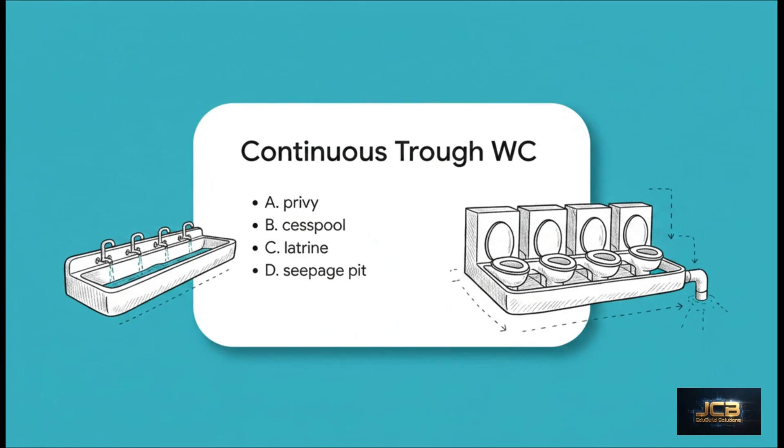Got your answer? The correct answer is C, latrine. The big giveaway here is the phrase continuous trough. When you see that, you should immediately think of a communal, multi-user setup like in a military barracks or a temporary work camp. That's a classic latrine. Let's keep the ball rolling.

The unobstructed vertical distance through the free atmosphere between the lowest opening of the pipe and the flood level rim of the receptor. What do we call that? Your options are A, air break, B, air gap drainage, C, indirect waste, or D, air gap water distribution.

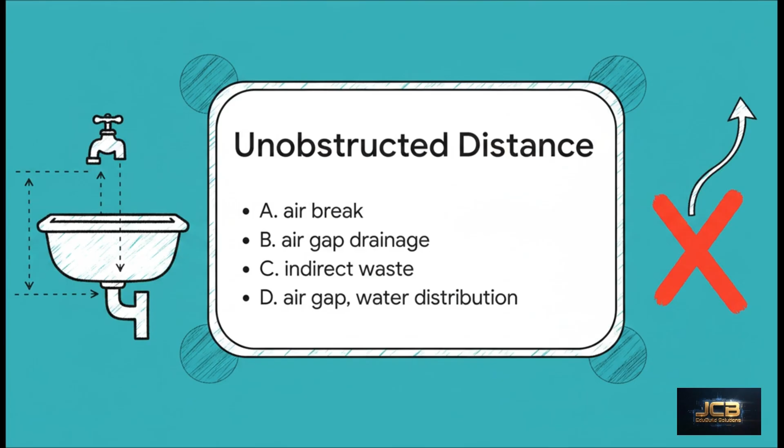The correct answer is D, air gap water distribution. Guys, this is a non-negotiable safety feature. That physical separation is what makes it impossible for contaminated water to get siphoned back into the clean water supply. It's absolutely fundamental. All right, an important definition here.

Discharge from any fixture which doesn't contain fecal matter. Is that A, wastewater, B, solid waste, C, liquid waste, or D, waterborne waste? And the answer is C, liquid waste. You need to know this specific term. It's what we call wastewater from places like sinks, showers, and washing machines. This is what distinguishes it from black water or soil waste, which, as you know, does contain fecal matter.

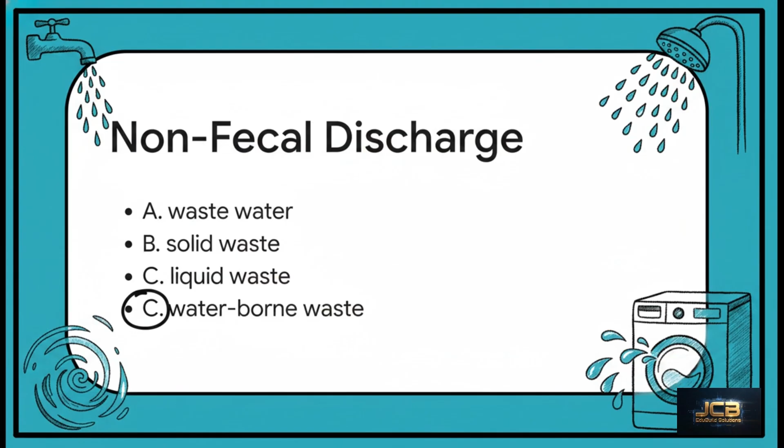Let's talk about fittings. What do you call a pipe flange that is not drilled for bolt holes? Is it A, blind flange, B, bolt flange, C, closet flange, or D, blank flange? The correct answer is A, blind flange.

Now don't get tripped up by the term blank flange. I know it sounds right, but the official industry term you need to remember is blind. Its whole purpose is to completely seal off the end of a piping system. No holes means no passage. Simple as that. Time for a quick but crucial acronym check. You will see this on plans and specs all the time.

What does IPS stand for? A, internal pipe size. B, International Plumbing Society. C, International Piping System. Or D, iron pipe size. The correct answer is D, iron pipe size. This is a key North American standard for pipe dimensions. And, quick tip, always remember it refers to a nominal size, not the exact measurement of the pipe's inside diameter.

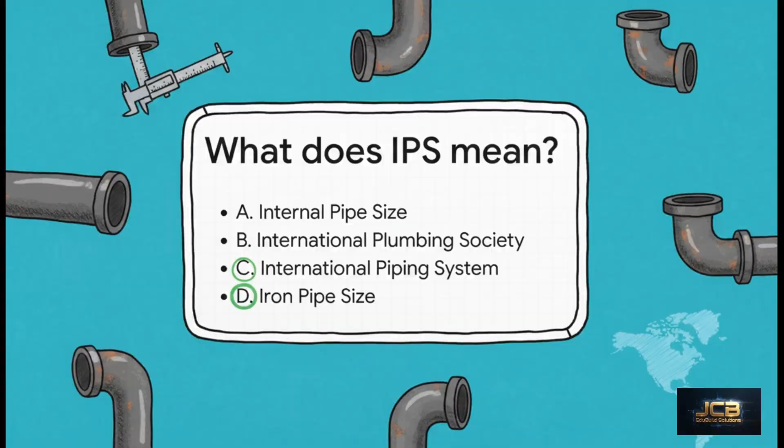All right, think about different on-site disposal systems for this one. A non-watertight receptacle where raw sewage is discharged and seeps through the sides and floor. Is it A, seepage pit, B, septic tank, C, cesspool, or D, catch basin? The answer is C, cesspool.

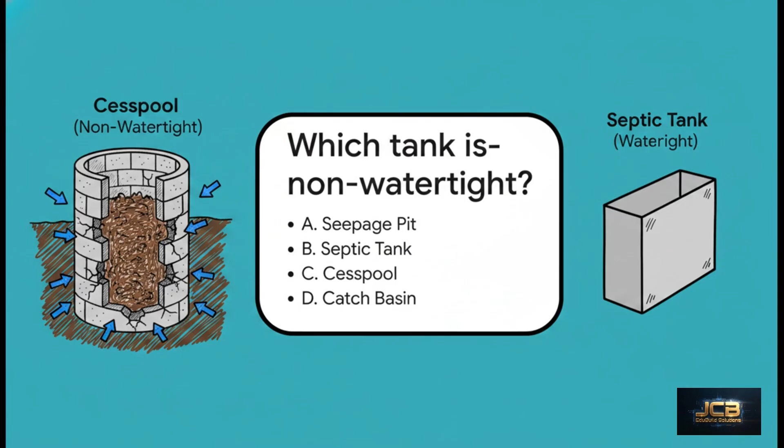The absolute key phrase here is non-watertight. A septic tank is a sealed container designed to treat waste. A cesspool, on the other hand, is basically a pit designed to let the liquid waste, or effluent, seep directly into the surrounding soil. Big difference.

How about this one? What do you call a drain that receives both sanitary waste and stormwater? Is it A, sanitary drain, B, storm drain, C, combination drain, or D, all of the above? The answer is C, combination drain. You'll find these in many older municipal systems where one big pipe handles everything. As you know, modern plumbing design almost always calls for separating these two systems.

Last one for this round. What do we call an extended portion of pipe closed at one end with no connections that allows liquid or air to stagnate? Is that A, clean out, B, branch, C, dead end, or D, air chamber? The answer is C, dead end.

And this is so important to remember. Dead ends are almost always prohibited by modern plumbing codes for the very reasons stated in the question. They cause stagnation, which leads to sediment buildup, clogs, and really bad odors. Fantastic job on round one. You're nailing the vocabulary. Now, let's switch gears.

In round two, we're moving from definitions to applications. This is all about knowing the specific codes, rules, and standards you'll have to apply on the job and on your exam. All right, first question in round 2. This is a straight-up code question. Fill of grease interceptor. Is it A, 2, B, 3, C, 5, or D, 6?

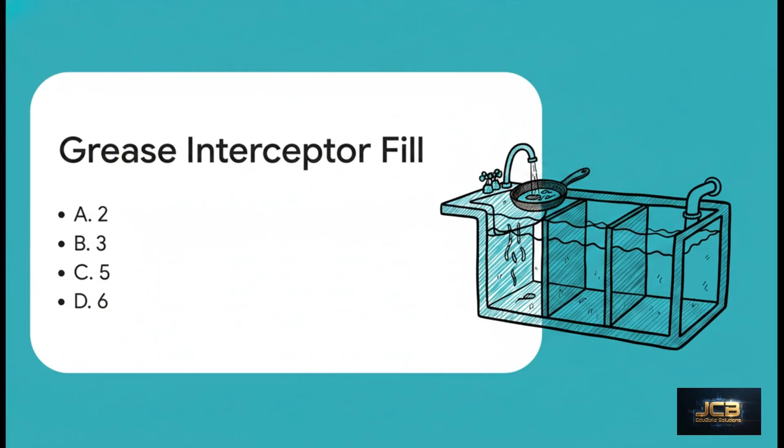The correct answer is C, 5. Look, this is one of those numbers you just have to commit to memory from the codebook. There's no way around it. It's a standard value, and you're expected to know it cold. Okay, a long one, but it's important.

Which section of the code makes it unlawful to deposit things like ashes, cinders, or flammable liquids into the drainage system? Is it A, Section 1202.1, B, Section 1202.2, C, Section 1202.3, or D, Section 1202.4? The correct answer is B, Section 1202.2. Knowing the key section numbers for major rules and prohibitions like this one really shows the examiners that you've done your homework.

Let's tackle a classic fixture unit problem. What is the fixture unit for an air conditioning unit that has a flow of 0.05 liters per second? Is it A, 1, B, 2, C, 3, or D, 4? The answer is A, 1. This is a standard value you pull directly from the fixture unit tables in the plumbing code. Getting these calculations right is the bedrock of sizing your drainage systems correctly.

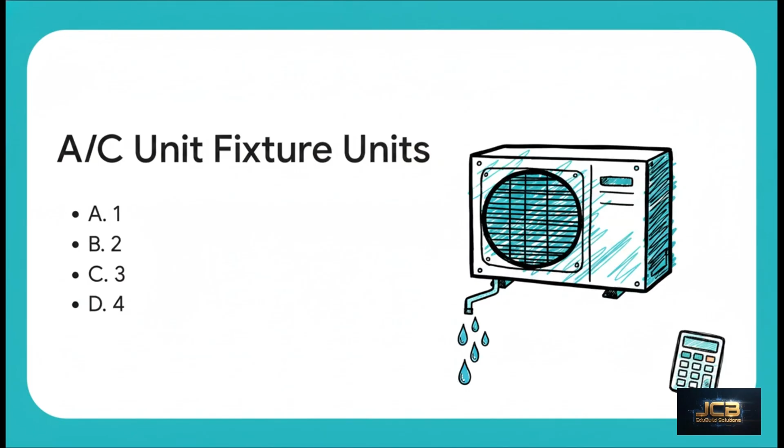Here's a question about material-specific rules. No cast iron pipes shall be blank. A, caulked, B, soldered, C, threaded, or D, welded. The correct answer is C, threaded. And the reason for this is pretty simple. Cast iron is brittle. If you try to cut threads into it, you weaken the pipe and make it incredibly prone to cracking under pressure. That's why we use other joining methods, like bell and spigot joints or mechanical couplings.

Okay, a very practical question about system layout. What's the maximum horizontal distance of cleanouts? A, 30 feet, B, 40 feet, C, 50 feet, or D, 60 feet? The code says the answer is C, 50 feet, which is roughly 15 meters. And this number isn't just random. It's based on the practical length of standard drain cleaning equipment to make sure every part of the system is accessible for maintenance.